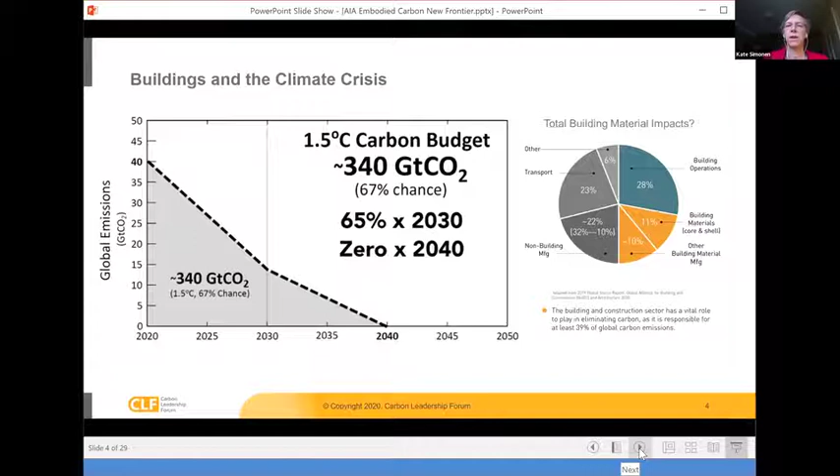But there's all sorts of other manufacturing and transportation related to building materials, so we can estimate that the total impact of buildings can be as much as half of the total greenhouse gas emissions. If you just look around our world, what we see by volume and mass are buildings. So it is that infrastructure that drives a massive amount of the global greenhouse gas emissions.

But if California, as an example of where we want to go, is down to zero by 2040, we have to recognize that the emissions we are responsible for are not just the emissions that we emit in a single location, but also the emissions related to the goods that we purchase and bring into our region. This is sometimes called the carbon loophole, in that if we track only the emissions that happen in our own facility, like our own house or our own state, we're missing the emissions that took place from material and product manufacturing.

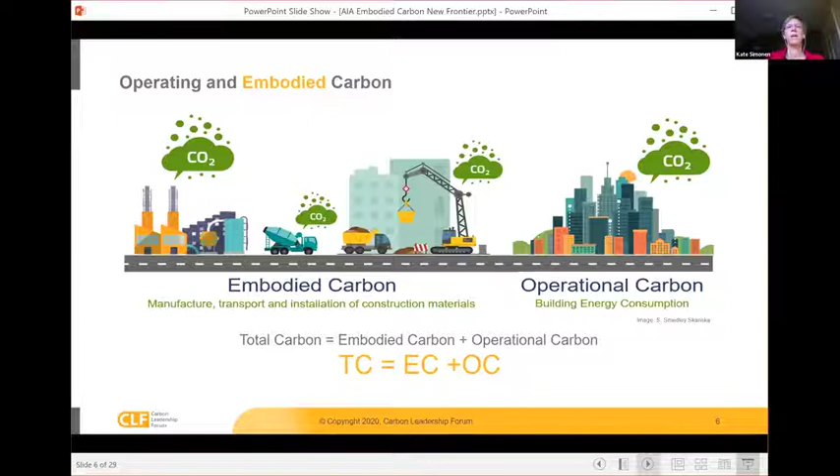So in the building sector, we call those emissions embodied carbon or embodied emissions. Those are the emissions that take place when factories run, you drive trucks, you install and maintain buildings and eventually dispose of the materials in buildings. That's compared to operating carbon, the carbon from building lighting, heating, cooling, and all of those things. And we're calling embodied carbon the new frontier because we have been spending a lot of energy focusing on operating carbon and not as much on embodied carbon.

So for the buildings that we build today, as we're looking at radical reductions over the next 10 to 30 years, if you look at a building over that 10 to 30-year lifespan, more than half of the impacts for even just typical buildings are related to the materials that go into them.

When we're looking to understand embodied carbon, we're using a methodology called Lifecycle Assessment or Environmental Lifecycle Assessment. Similar to life cycle costing, which looks at the cost of a choice over the entire life cycle of a building, environmental life cycle assessment, instead of tracking dollars, tracks environmental impacts such as greenhouse gas emissions or carbon, but also others such as smog formation or acidification.

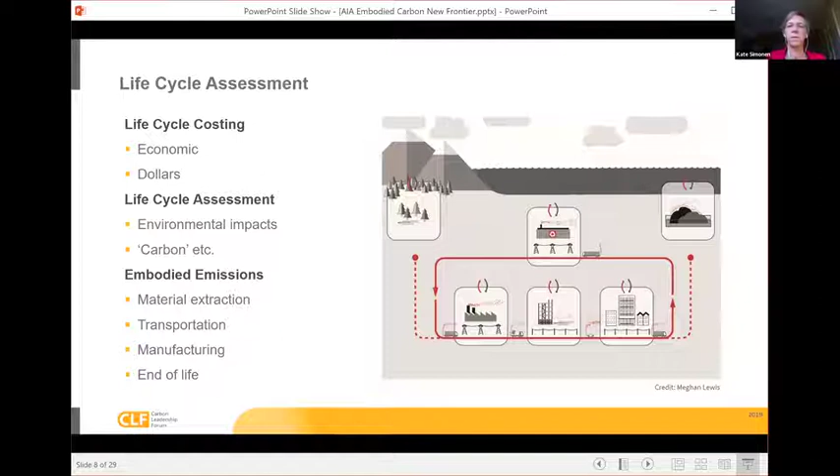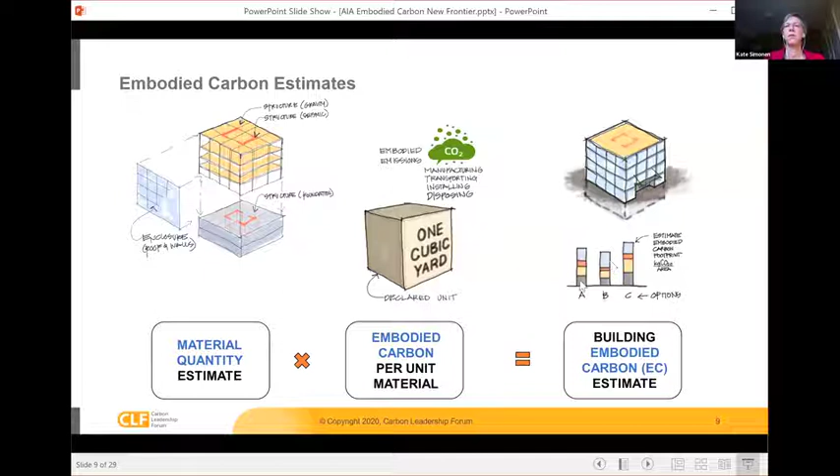If we're looking at a building and wanting to understand its embodied carbon impacts, we're really looking at two things. We're looking at the quantities of materials that are used, so how many cubic yards of concrete, how many square feet of glass, and then the embodied carbon impact per those materials. So those are typically generated in data sets that give you emissions to produce a single unit of material, like a cubic yard of concrete or a kilogram of steel. And those can then be wrapped up into a whole building life cycle assessment or whole building embodied carbon assessment, where you can find the relative contributions between different component parts or compare between two different design options. So changing out your structural system or your facade system, you could compare them.

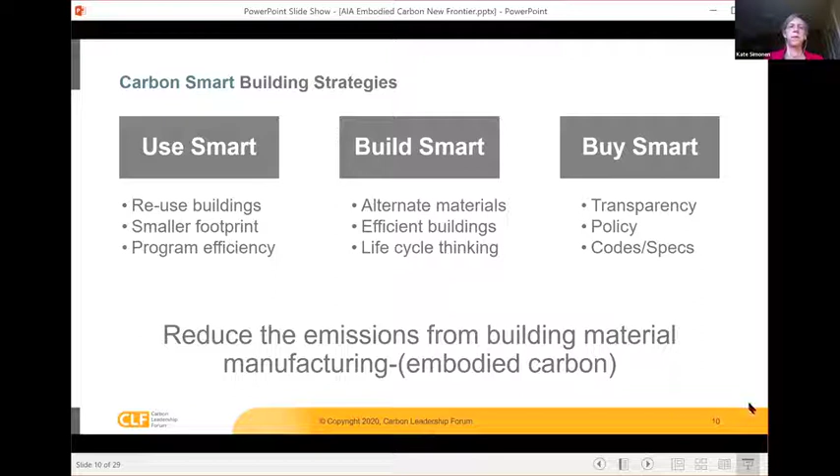There's three main strategies for reducing embodied carbon. The first one is use it smart, so that's reusing existing buildings, building something smaller. Build smart, so this is where you're deciding which system to use and trying to compare alternate assemblies. And in that case, you really need to look at the total life cycle impact, because a straw bale wall and a glass curtain wall perform differently over their use and end of life. And then the third one is buy smart, so that would be purchasing the lower carbon option when you know that you're buying something. So let's say I'm buying steel, can I buy the lower carbon footprint steel that performs the same or similarly?

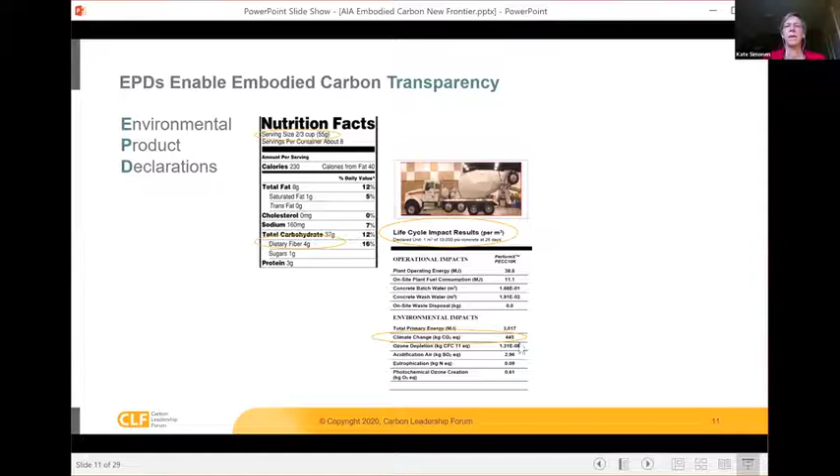One method that's used to evaluate embodied carbon is an environmental product declaration, somewhat like a nutrition label. Instead of cups of servings, it provides a cubic yard or cubic meter of concrete, and instead of carbohydrates or fiber, it's giving you an environmental impact like climate change, embodied carbon. I should note that these are less like a nutrition label and more like a miles per gallon on the car, that they're directionally accurate. A car with a higher miles per gallon typically gets more miles per gallon than one with a lower, but we know that there's some variation that happens in the actual implementation of that.

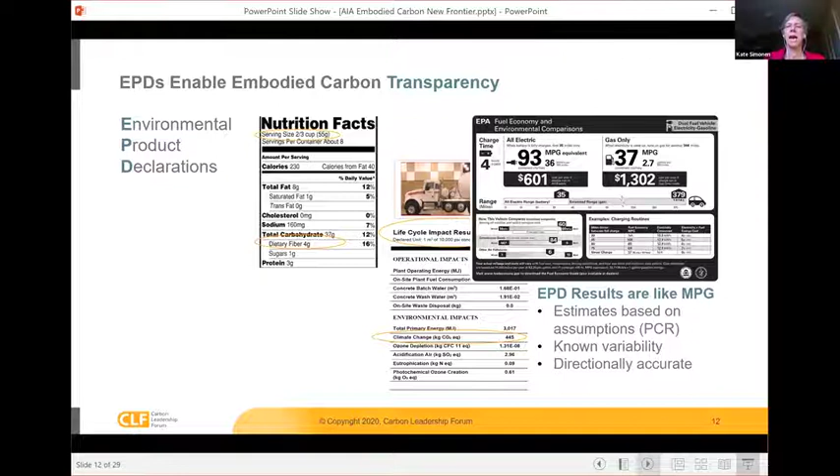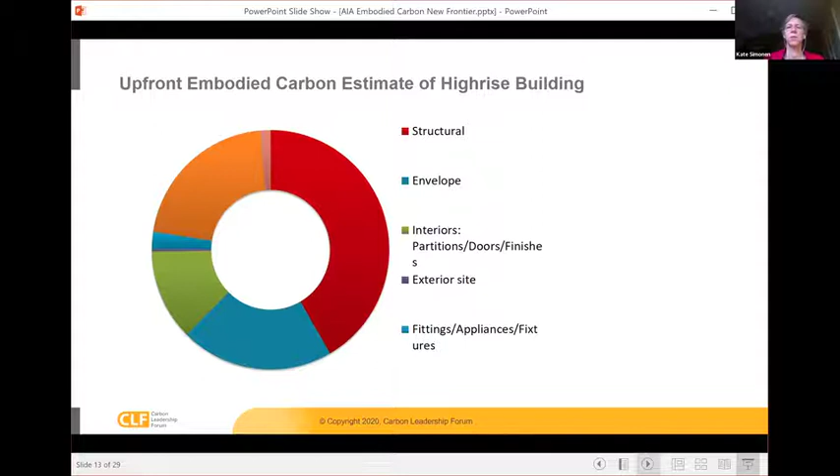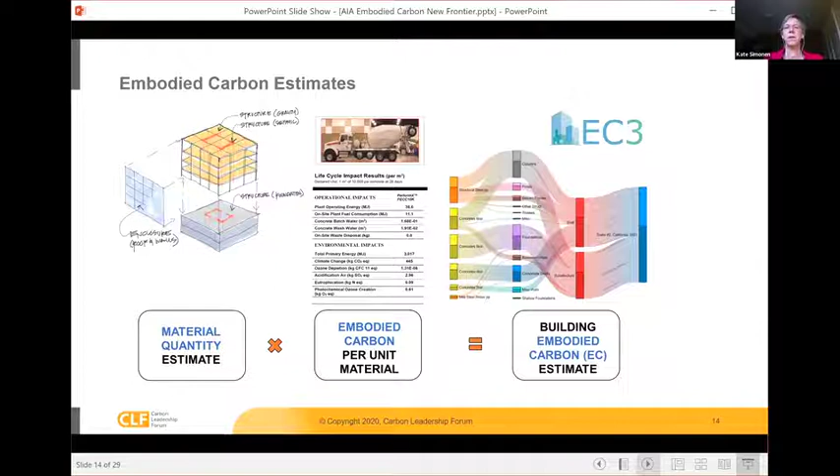So there's multiple tools available that can help you evaluate embodied carbon. A specific one that the Carbon Leadership Forum helped to incubate is the Embodied Carbon in Construction Calculator. So that's a free online tool that you could use. And so, answering my question, what are things that you could do today? We have three main sort of strategies, or actually maybe steps, levels of engagement. So if you're just entering the world of embodied carbon, we've got three places that we'd recommend you go. And at the Carbon Leadership Forum website, it'll link to them. This one's really fun. It's less than a minute and a half long introduction to the topic. So this is a great one to share with social networks, your family, colleagues, just to make sure they are aware of the issue.

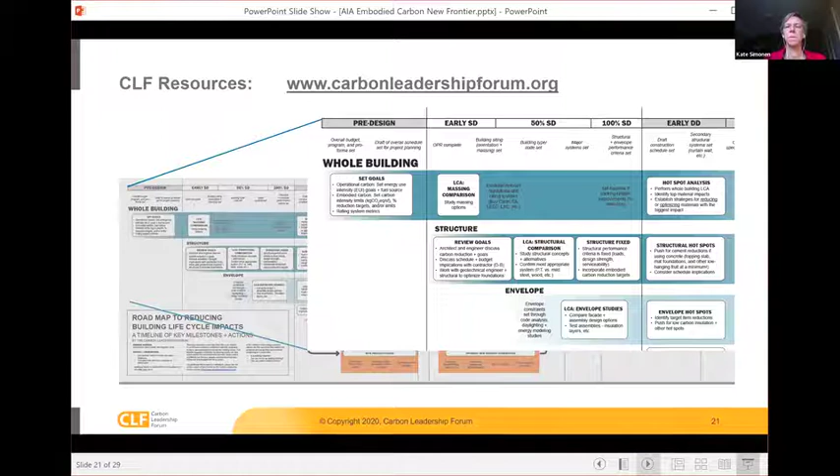Then if you're wanting to implement this in practice, we have multiple resources at the Carbon Leadership Forum website to help engage. And one that I'm particularly excited about is a new online communication forum that is now open, and we've got over 1,000 people in different focus groups and regional hubs sharing information and acting. And then if you're looking to get more details, there are more detailed resources like this roadmap for reducing building life cycle impacts, where it goes through, if you're in pre-design phase, what are some things that you can do? So that's resources at the Carbon Leadership Forum website. And then there are others like Architecture 2030 that I'm hoping will get shared in the chat.

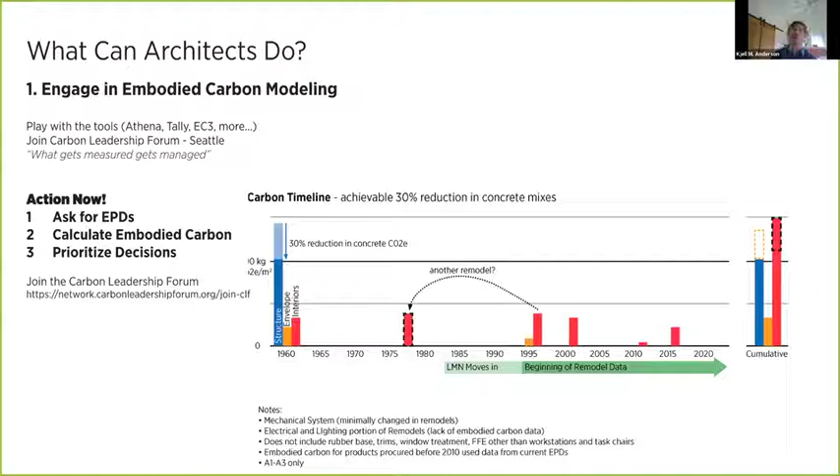Number 2, get familiar with the software or find someone who is. Tally and EC3 are simple enough to use with only online training videos. But you should also join the Carbon Leadership Forum email list in the CLF Seattle chapter, where we do presentations and discussions on these tools.

Number 3, use 1 and 2 to make decisions, informed decisions. Lower carbon concrete is easy enough to specify if you work with your contractor and structural engineer. There are also many other products like steel, gypsum board, carpet, ceiling tile, where you can find preferable products to spec. Modeling will tell you which are the most impactful for your project and what you should focus on.

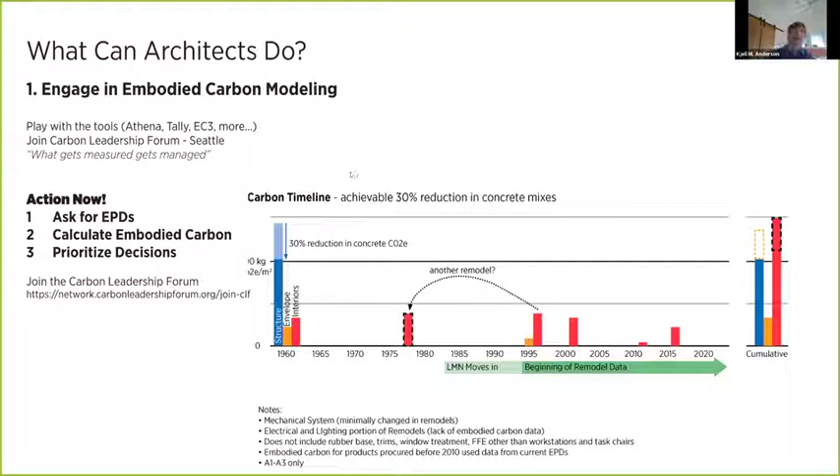You also need to calculate the embodied carbon to be able to specify targets for concrete, for example, to include in your specs. Goals for that are often in Division 1 and the structural divisions, but EPDs can be requested in any division. The most important thing with embodied carbon is to get started, wherever you're starting from, as Kate said, and start with something you understand and control. And don't be afraid to reach out to others, as we're all learning together.

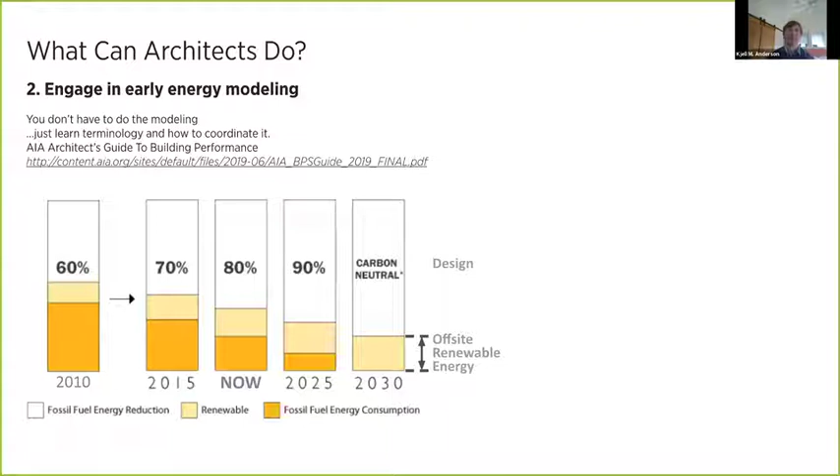Okay, so engage in energy modeling. I hope you've seen this, the 2030 challenge chart, leading to carbon neutral new buildings by 2030. You should also be reporting. The deadline was extended to April 23rd this year for AIA 2030 commitment, so please report. Here's what I overlay on the chart. As architects, we are responsible for passive design. If we do it right, we can eliminate or downsize mechanical systems.

The challenge, of course, is that mechanical engineers who design the active systems typically have energy modeling in-house. We as architects don't have this service in-house, meaning we don't generally generate data telling us how we are doing with our passive design, but we still must engage in energy modeling. What does this mean? This means we work with our mechanical and energy analysts to understand how our envelopes are performing. While we don't do the modeling, we need to lead this process by asking the most impactful questions of our consultants.

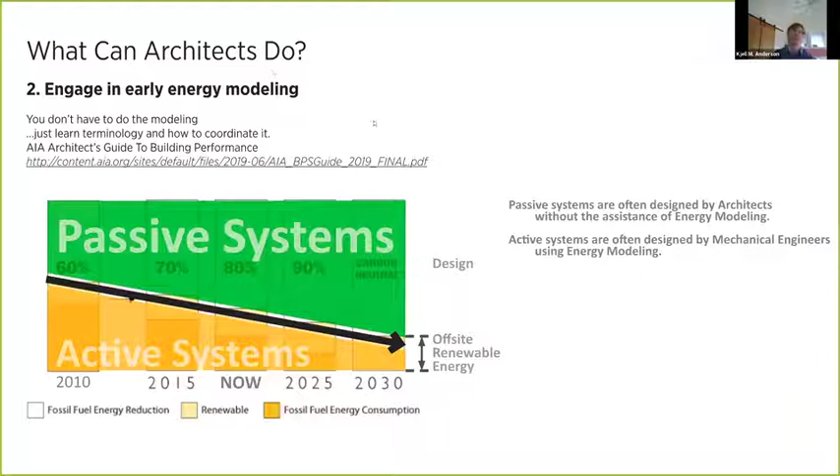If we are able to downsize or eliminate mechanical systems, we can save money and embodied carbon because, as Kate showed, mechanical systems actually have a significant embodied carbon impact. And we can transfer the money from M and E to the envelope while reducing energy use. RMI calls this tunneling through the cost barrier. If we can actually eliminate a mechanical system by improving the envelope, which we've done on many projects, we can find large savings and transfer those to the envelope to get large energy savings.

3 more tips. These are my last tips. Most energy modeling will show that the envelope improvements don't actually save energy, but this is false. I repeat, we get misleading information often when we ask our energy analysts for information about the performance of the envelope for 2 reasons. 1, we are not asking for the right information, and 2, because thermal comfort often isn't being adequately considered in their results.

So number 1, we need to ask for peak cooling and peak heating out of the energy model instead of just annual energy use. Peak cooling and heating are often driven by envelopes. With better envelope, we can reduce the size of the mechanical system, saving cost, or perhaps just transferring it. If we reduce the peak heating or cooling enough, we can in some cases use a more advanced mechanical system.

And because we already reduced the size of the mechanical system, an advanced mechanical system now costs less. So ask for peaks. Number 2, comfort. Most energy modeling results don't consider thermal comfort adequately. Often people near large windows are too hot or too cold, so they ask for additional heating or cooling to be turned on, driving up energy use. Models are not good at predicting this unless we as architects specifically ask for it. Ask for mean radiant temperature in perimeter zones, and you will probably get the right answer.

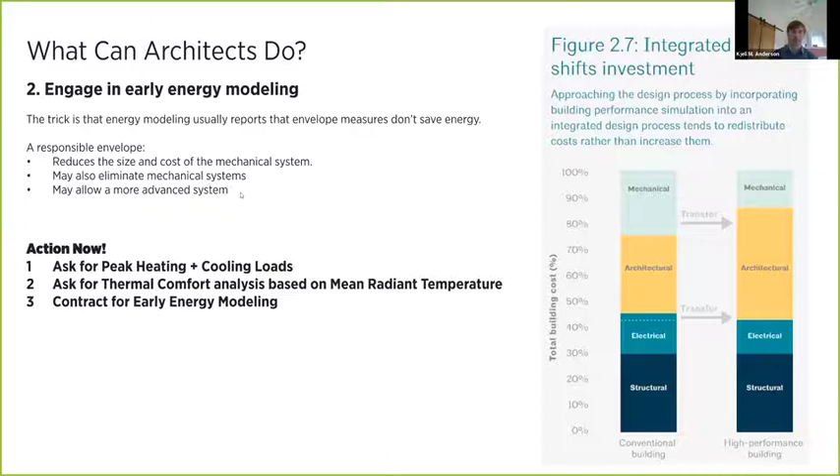So we're actually saving not only a lot of water, a lot of energy, but we're saving embodied carbon in the infrastructure of energy. So engage in embodied carbon modeling and engage in energy modeling. This gets us closer to understanding the total carbon picture of a project. I hope this slide makes more sense now. This kind of comparison between embodied and operational can help us as architects determine if more insulation, better glass, shading, or other changes is an overall climate win or not.

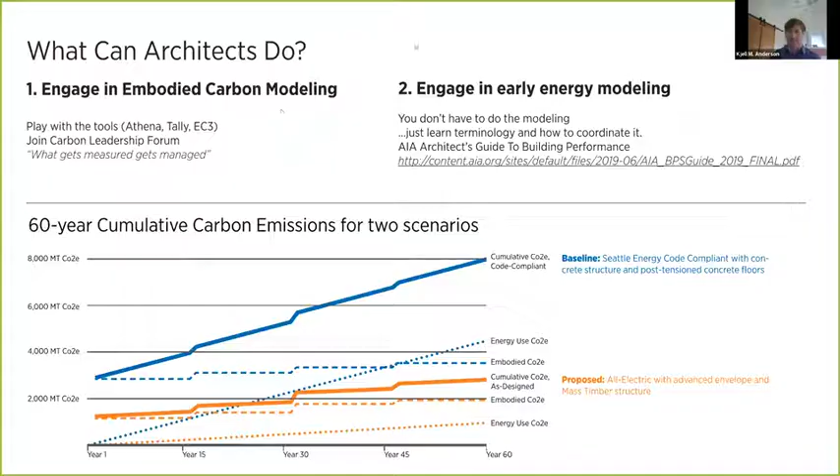With that, I am going to hand it off to Landry. Thank you. Is everybody hearing me? Audio? Okay, good. All right. Hey, I am Landry Watson.

I work for Alexandria Real Estate. I'm here to help hopefully represent the owner landlord side of this conversation today. Alexandria Real Estate is an urban office REIT. We tend to build almost exclusively for advanced tech and biopharma. So we build labs, which are huge energy consumers. We are a market cap of about 26 billion, and we have almost 30 million rentable square feet spread across 7 major markets where we cluster our buildings. Specifically on the West Coast, you've got Seattle, San Francisco, and San Diego. On the East Coast, you've got Boston, New York, Maryland, and the Research Triangle.

Specifically, I'm the executive director for sustainability, and I support the West Coast, all of our new construction and national initiatives. Embodied carbon is definitely one of those. Prior to that, I spent about a decade with a general contractor, so I've been on both sides of the table in the OAC. So I have a little bit of perspective on the finger pointing and the discussions of who's at fault with respect to either lowering EUI or potentially embodied carbon. And we'll talk about those a little bit later.

The question to us posed by panelist Kate was what drives you? And I of course echo everything that Kate and Kjell said, but what I would specifically say, as being on both sides of the OAC and understanding whose money is being spent, I am more passionate about reducing embodied carbon right now than I am in reducing operational carbon. Operational carbon is fraught with disaster. Even when you feel like you're the landlord or the owner of the building, you've always got a customer who would spend as much or consume as much energy, resources or water as they feel necessary for their investors.

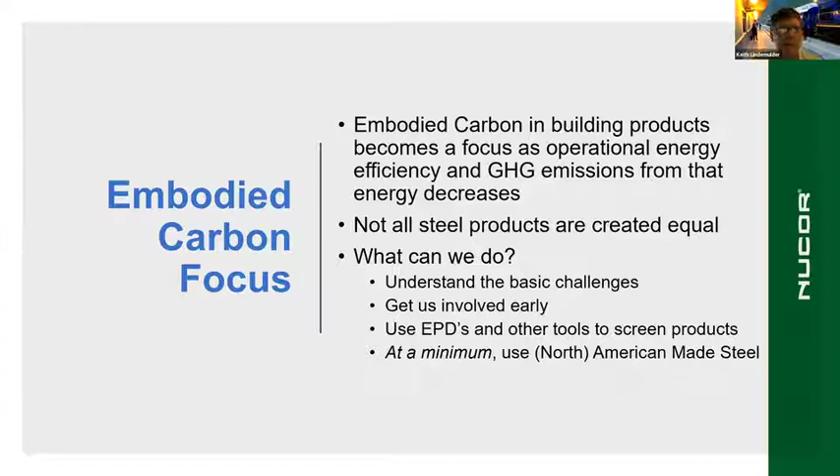So what else is happening in the world today? We again have been a bit of a target for some of this. A lot of the Buy Clean legislation, specifically in California, which is the only state right now with a law currently on the books. Of the 4 products listed in the Buy Clean California law, 2 of them are steel products. One is structural steel and one is rebar. Flat glass and hardboard mineral wool insulation is the other.

So our goal has been to stop being the target and start being what I would consider to be the tip of the spear, to try to bring solutions to some of these difficult things. In California, a little history there, it is a current law, and through this history, you'll see some of the challenges that we face as a material supplier in this process. So it is a current law. The law applies to state-funded projects. That's an important distinction, and they are currently in the threshold setting process.

The idea being that if you source steel products for these buildings that are state-funded, they must be at or below the threshold set by the Department of General Services. That has presented a lot of challenges. I suspect it will continue to present challenges going forward. Right now, it only involves structural material, although there is a proposal to add interior materials. And one of the challenges as a material supplier, the focus in California is on the steelmaking component of it, not necessarily the fabrication piece of it.

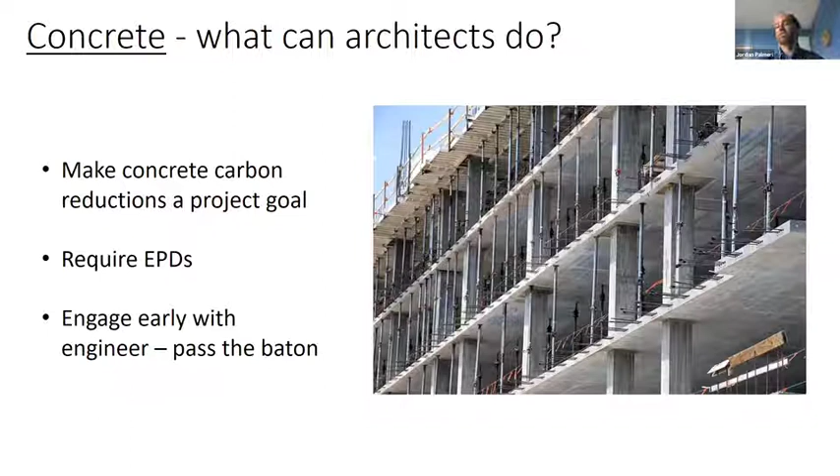The final advice I have for architects trying to lower the impacts of concrete is to get the engineer involved as early as possible and then pass the baton to them, right? It is, after all, their job to write the concrete specs. So empower them to do their part on the project, which will then allow you, as the architect, to do other things. Other things like perhaps supporting more embodied carbon policy in your local communities.

Now, when it comes to policy, I'm going to echo some of what the other speakers have said already, and ask you to get involved in measurement and whole building life cycle assessment. I believe measurement and disclosure policies are really the next wave of policies that we're going to see in cities and states across the Pacific Northwest, just like we already see in Vancouver, BC.

Now, what I want to emphasize here is that embodied carbon modeling is akin to energy modeling 10, maybe 15 years ago. You know, there's a lot of competing tools. There's not terribly meaningful baselines at the moment, and sometimes you get inaccurate results. Now, we're not going to get any better at this until we start practicing, right? So just accept that it may be messy at first, which is really okay.

The other thing I want to advise about LCA is don't use it as a really precise tool right now. Instead, use them to provide directional guidance for material selection. Even though it gives you 3 significant digits after the decimal place, that doesn't mean that it is accurate to 3 significant digits. So use them as directional guidance.

The next thing you can do to support embodied carbon policy is to share your success stories. Not only will this empower others to follow suit, but it will also indicate a market readiness that many policymakers seek when considering new policies.

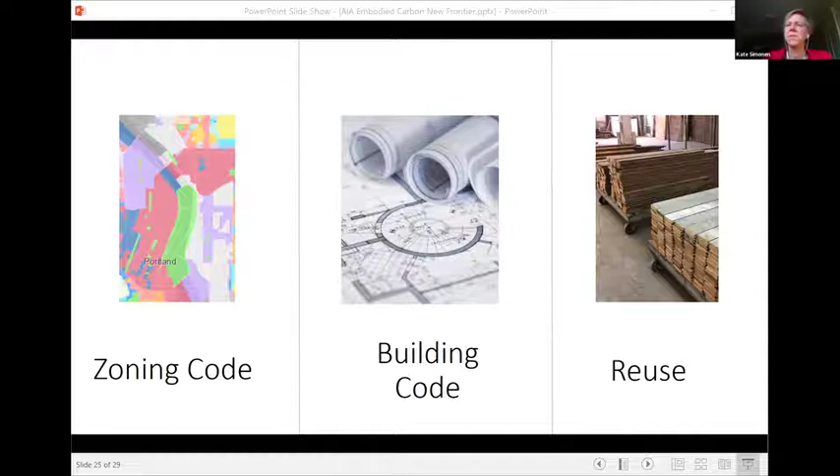Thanks, Jordan. That sort of makes me think to Landry, because you mentioned a little bit about the relationship of where you have leverage and what type of action you can take as an owner, and where you see the possibility of that, and how that fits in with policy. And so sort of the relationship of how private sector actions can be driven by private sector goals or climate commitments, and how that overlaps with public sector policies. So could you give some thoughts on that?

Okay, so that was a lot to unpack, Kate. You got to give me small questions. Okay. Well, okay, so you can go for it. Pick any part of that.

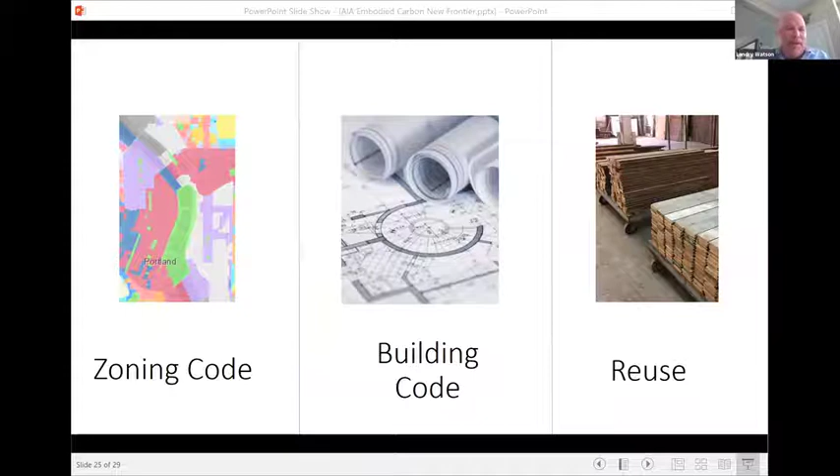Let's start picking apart commitments first, right? So I joked around a little bit about commitment organizations earlier. I hope I didn't offend anybody. Bottom line is that you're either driven by code, right? The carrot and the stick. Or you try to present yourself as an early adopter, get out there in front of things, knowing that it's gonna become code eventually, and you're just desensitizing yourself or your customers to whatever that price signal that market change is, right?

So with the pandemic in place, we were very close to a lot of states making action on climate action plans and carbon pricing and things like that, which would have moved the needle perhaps on a lot of what we do in the built environment. But with those things not in place, again, I fall back on being able to control something.

It should not be a shock to anybody that the price tag of fossil fuels is not even realistic. We've got this entire global market which revolves around a completely falsified and subsidized price of a thing which drives our GDP. And so you've got all these things that feed into that. I can't control that stuff. I really can't. But I can attack EC. I can drive change. And not to pick on Keith and the steel industry, it's not just steel. He's absolutely right. It's the entire built space.

So we made a decision last year, obviously not having a clue about a virus coming our way, but understanding that we had much more control over EC than we did over operational carbon, and that code was going to drive operational carbon more than the EC. So we said, hey, we can get in front of this and make commitments. In our corporate report last year, we said we're going to do carbon benchmarking on every single new construction project and major renovation where we touch the buildings, and we're going to target a 10% reduction. We have a stretch goal of 30%, which is in line with the pilot credit that the USGBC announced for LEED.